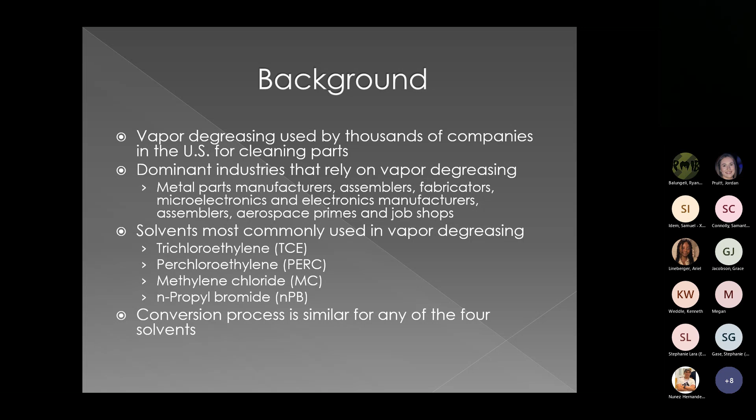The four halogenated solvents have a whole range of health and environmental problems. In terms of health effects, they're all carcinogens, and some also cause nerve damage and reproductive and developmental problems. Methylene chloride in particular has caused deaths from acute exposure. In fact, because of the numerous deaths it's caused, EPA ended up banning the use of methylene chloride in consumer product paint strippers a couple of years ago. That was where most of the deaths were occurring, from exposure to these consumer product paint strippers.

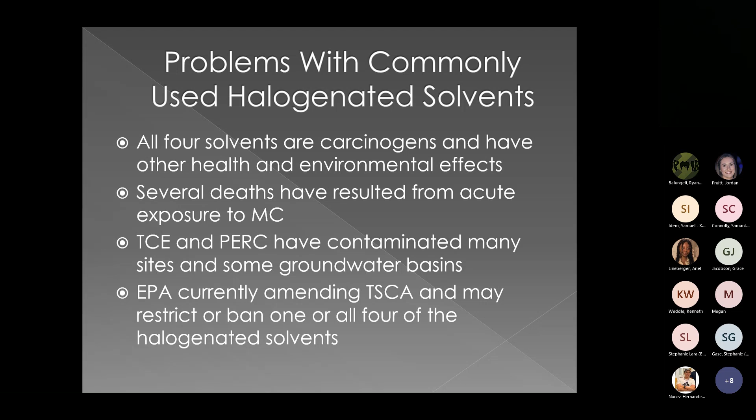For many years, PERC and TCE have leaked from operations or been improperly disposed of, causing contamination of soil and groundwater in many parts of the country. Some states and local districts have restricted the use of these solvents, and EPA, under the Toxic Substances Control Act, or TSCA, is currently evaluating the four solvents for potential nationwide regulation. EPA's findings so far under TSCA indicate that all four solvents pose an unacceptable risk in virtually all of their applications, including vapor degreasing. So the solvents are likely to be more stringently regulated or banned across the country in the future.

Now, some of you may not be familiar with the vapor degreasing process, and I'm just going to describe it briefly in simple terms. For those familiar with it, bear with me. A vapor degreaser is a stainless steel tank with a heater in the bottom and a set of cooling coils around the top perimeter.

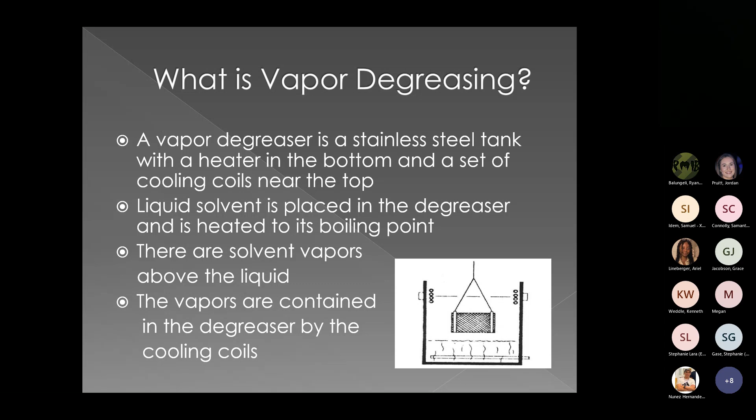You place liquid solvent in the vapor degreaser and heat it to its boiling point. This establishes a vapor zone of solvent above the liquid zone. The cooling coils around the top condense the solvent vapors back into the liquid zone, essentially holding the solvent in the vapor degreaser, although they don't do too good a job since there are, of course, emissions that do occur.

Now, the way vapor degreasing works is that you place the dirty parts into the vapor zone of the degreaser, either in baskets or on fixtures. When you put those cold parts into the warm solvent vapors in the vapor zone, it causes those vapors to condense onto the parts, and that cleans them.

The dirty solvent liquid falls into the liquid zone of the degreaser so that the vapor zone is always composed of clean solvent. This definition is very simplistic for the basic degreasing process, and many systems and processes have additional features and are much more complex.

But the degreaser I showed you on the previous slide is an open top degreaser, and the solvents used in those systems must not have flash points. Flash points for solvents are lower than boiling points, so if you heat the solvent to its boiling point, it will encounter the flash point first. And if there is a source of ignition present, the solvent could either ignite or explode in the vapor degreaser, which would obviously be very dangerous.

So the 4 halogenated solvents that I'm discussing here don't have flash points, so they don't pose that problem. Near the end of the presentation, I'm going to return to this point, which is why I brought it up.

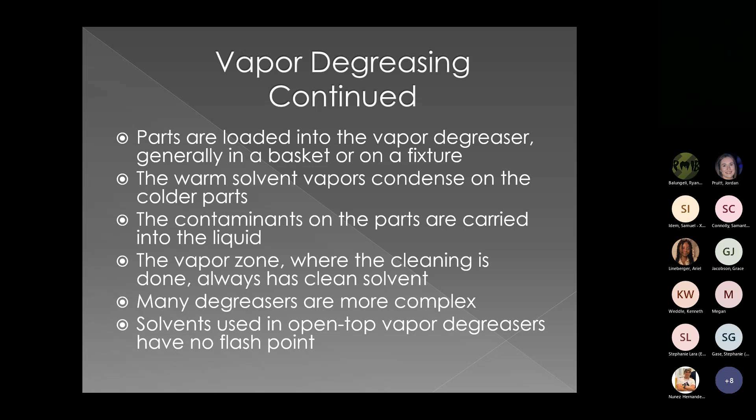Now, turning to the case studies, I worked with 8 different companies in 3 projects for the case studies I'll discuss today. There were 4 companies in a project I worked on with the nonprofit organization called the Pollution Prevention Resource Center, or PPRC, in the Seattle area. That project was sponsored by EPA under the Pollution Prevention Program under a grant. I also worked with 2 companies in a project sponsored by the Hazard Evaluation System and Information Service, or HESIS, which is part of the California Department of Public Health.

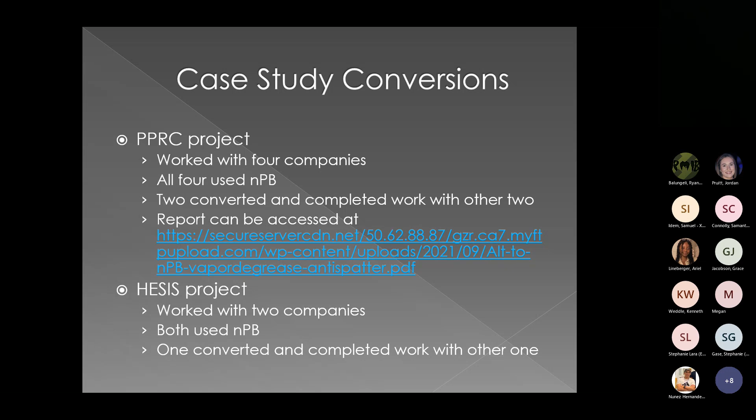In all 6 of these cases, the companies were using N-propyl bromide. That really isn't very surprising, since many regulatory agencies and pollution prevention providers have recommended that companies switch away from the 3 chlorinated solvents to N-propyl bromide in the last decade or so. That follows from the fact that N-propyl bromide wasn't designated a carcinogen until quite a bit later than the chlorinated solvents were. So many companies did move into that solvent.

I'll also discuss 2 case studies of companies I worked with in Southern California at an earlier time period, and these 2 companies used trichloroethylene. 5 of the total 8 companies I worked with ended up converting to the alternatives, and I completed work with the other 3 companies, but they didn't make the conversion within the project timeframe. As you'll see as I go on, I tried to select the case studies to represent a wide range of different types of operations that rely on vapor degreasing.

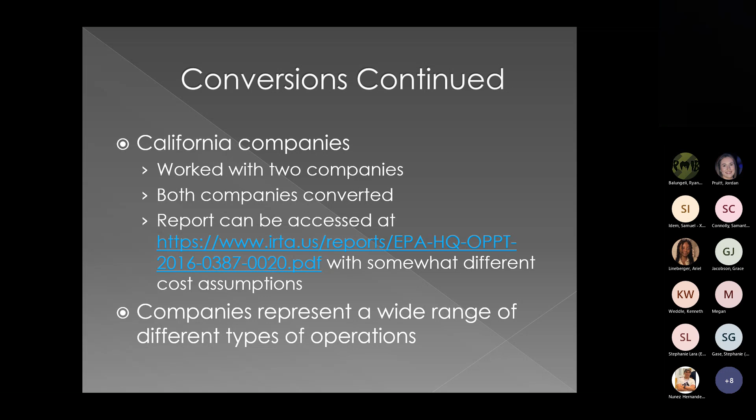The first case study I'll talk about is a company called MAPSCO in the Seattle area. MAPSCO offers non-destructive testing services to aerospace companies. The type of non-destructive testing the company performs is called magnetic particle inspection. In magnetic particle inspection, you use a fluid that contains magnetic particles and you magnetize it. You place the part that you want to look at in the fluid, and if there's a flaw or crack in it, the magnetic particles will line up next to it so you can identify where it is and repair the part rather than discarding it.

Historically, the company used a large N-propyl bromide vapor degreaser for cleaning the parts. We tested the company's parts with a water cleaner supplier, a company called Brulin, and we identified a suitable cleaner that the company was already using in other parts of their facility. The parts were cleaned effectively in the Brulin lab in an immersion agitation system, and accordingly, I sent in an equipment supplier to quote the cost of this type of system for MAPSCO, but MAPSCO felt the cost was too high.

So MAPSCO did find a secondhand system, but it was purchased by another company before they could buy it. So then I got in gear and found another place offering a secondhand system of the type that was originally quoted, and MAPSCO ended up buying it. They've been using it successfully for about a year and a half to two years now.

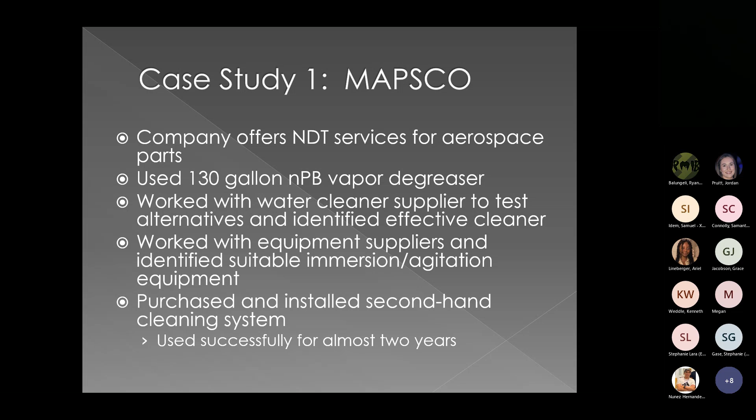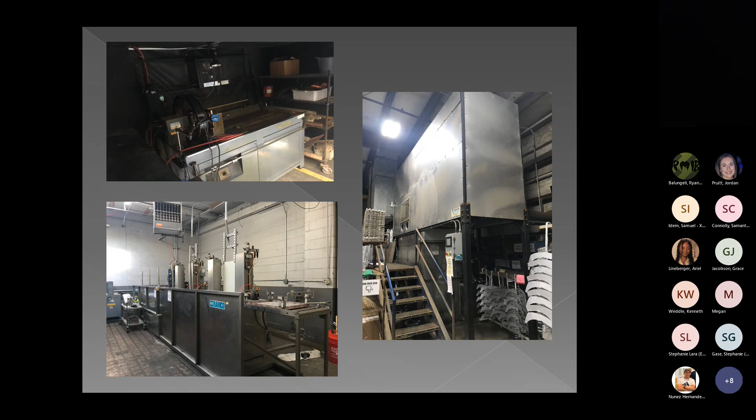In general, I also don't include the cost of the vapor degreaser in the analysis because in nearly all cases, the degreasers were purchased years ago, sometimes decades ago, and they've been paid off by now. I'm not going to be able to discuss the assumptions I made to do the cost analysis comparison for MAPSCO or the other case study companies today because of time constraints. I wanted to give you a flavor of a number of facilities, so I didn't want to take a lot of time describing how I got the numbers.

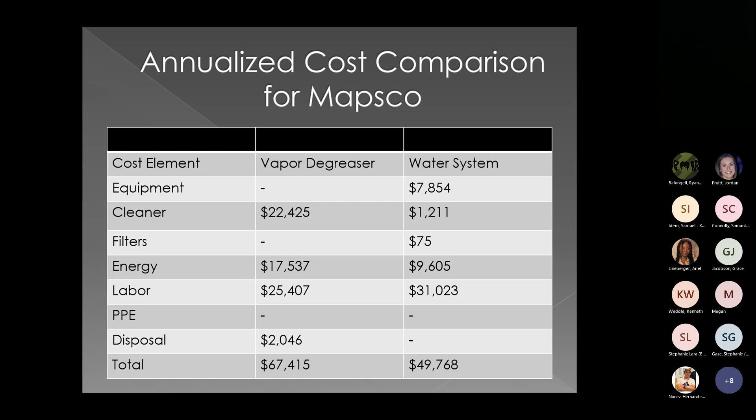I do discuss 4 of the case studies in much more detail where you can get this information in the PPRC document I referenced earlier. And as you can see, perhaps from the total cost figures on this slide, MAPSCO reduced their cost of cleaning by 26% by converting to the water cleaning system.

The second company I'm going to discuss is called Exotic Metals Forming, and they're in the Seattle area as well. They make ducting of all kinds for aerospace and industrial applications. The company used a large N-propyl bromide degreaser for many years. Now, Exotic is subject to a lot of aerospace requirements, and they're also subject to the European Union REACH requirements, and those can be very stringent, and sometimes they're different from the aerospace requirements. So you have to be careful.

We didn't want to have them convert to something that was restricted under the EU REACH regulations. So we did testing with a water cleaner supplier, and we did identify a good alternative. The company ended up converting to that cleaner for this operation and for most of their other water cleaning operations in the facility. The company was able to use one of their existing immersion agitation systems for cleaning the parts that had gone through the vapor degreaser previously. So they didn't even have to purchase a new cleaning system, which gave them a lot of savings.

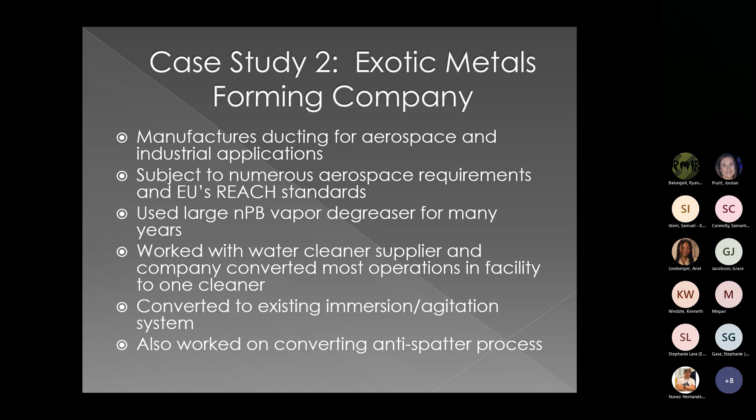And we also worked on a related process with Exotic using an anti-spatter product in a laser cutting operation. Over the years, I've worked with many different facilities, and I often would work on other processes when I started on a cleaning process with them—other related processes, or sometimes unrelated, that also use solvents.

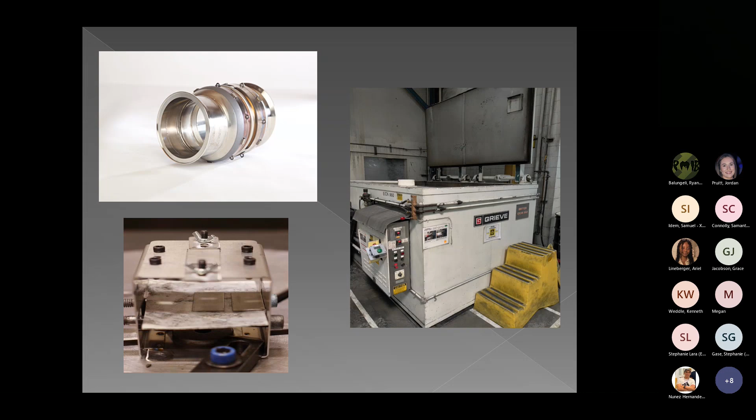So on the top left of this slide, the picture shows one of the company's parts. As you see, they're very complex. The picture on the right shows the vapor degreaser Exotic used. The bottom picture shows a fixture a company engineer designed for testing the anti-spatter alternatives.

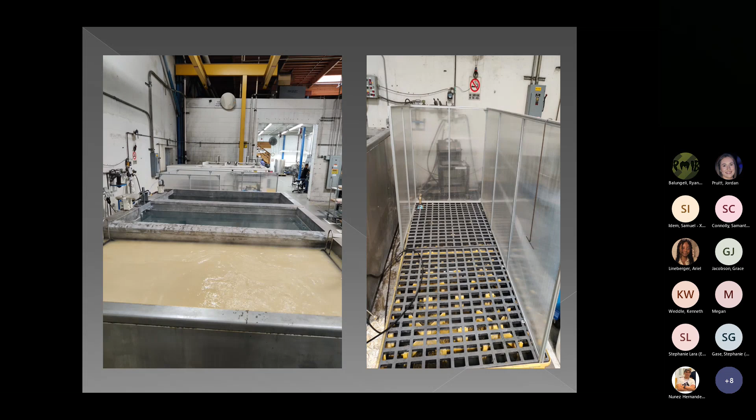This slide, the picture on the left, shows the immersion agitation system water cleaning bath and the 2 rinse baths that follow it. The picture on the right shows a temporary pressure washer rinsing station the company used, and they have to use that after the other 2 rinses. They have to really rinse these parts in order to get them cleaned. Exotic planned to purchase a better pressure washer station in the future, and I'm sure they've done that by now.

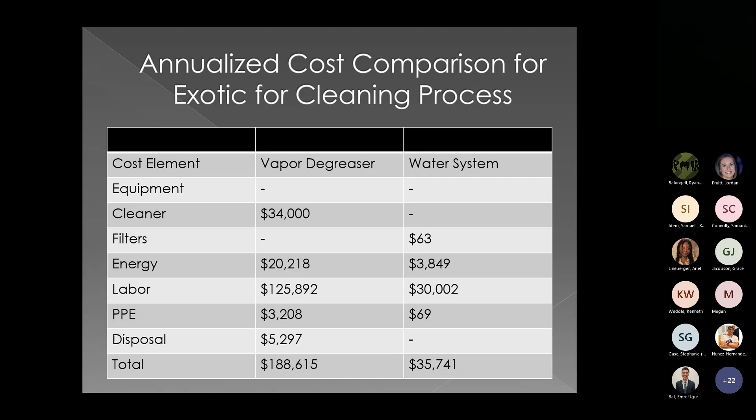This slide shows the annualized cost comparison for the cleaning operation. Again, I'm not going to describe how I determined the numbers. You can get that in the reference I gave you earlier to the PPRC report. But the total figures in the table show that the company reduced their cost of cleaning by 81% through the conversion. Now that is really a substantial reduction, and that's because they didn't have to buy a new cleaning system. They could use one of their existing systems.

So I decided to approach the supplier, and I spoke with the manager and asked if the company would be willing to reformulate the product. I even told him what family of surfactants he could use instead. But after weighing this, he decided that the company didn't want to change the formulation. This was probably quite short-sighted, since it's likely that endocrine disrupting surfactants will probably be regulated in the US in the not too distant future as well.

So I then approached Brulin, the company that was supplying the new water cleaner, and I asked them if they would try to formulate a water-based anti-spatter.

And they decided to accept that challenge, even though they didn't carry any products of that type at all. But they were able to make a water-based anti-spatter, and they also conducted all the testing necessary for satisfying the aerospace requirements for the company to use that. And the anti-spatter product they developed performs really well, and it's very cost-effective.

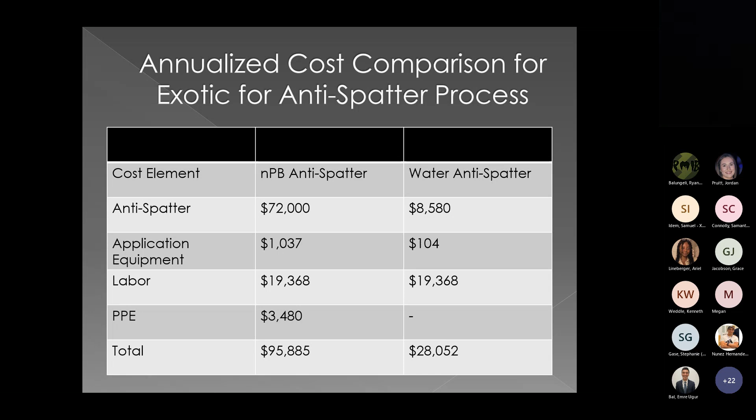So Exotic did convert to that product, and it ended up reducing the cost for the anti-spatter by 71%, which again is a substantial savings.

On the PPRC project, I also worked with a plating company, a job shop, that used an N-propyl bromide vapor degreaser for cleaning polishing compounds from parts made of a whole variety of substrates. Now, I knew from my past experience that polishing compounds are difficult to remove, and I knew we would need an aggressive water cleaner, but more importantly, an ultrasonic cleaning system for cleaning the parts.

Ultrasonic systems are very aggressive. We did testing with a water cleaner supplier and found a suitable cleaner. I arranged for two equipment suppliers to provide quotes for ultrasonic systems, and the company at the time considered them, but they didn't make the conversion in the time frame of the project.

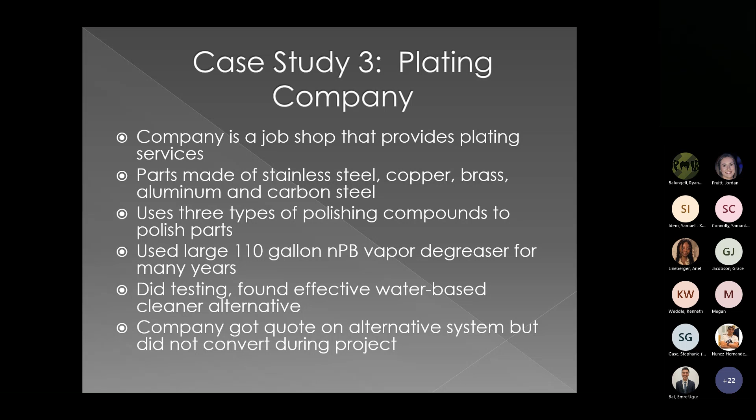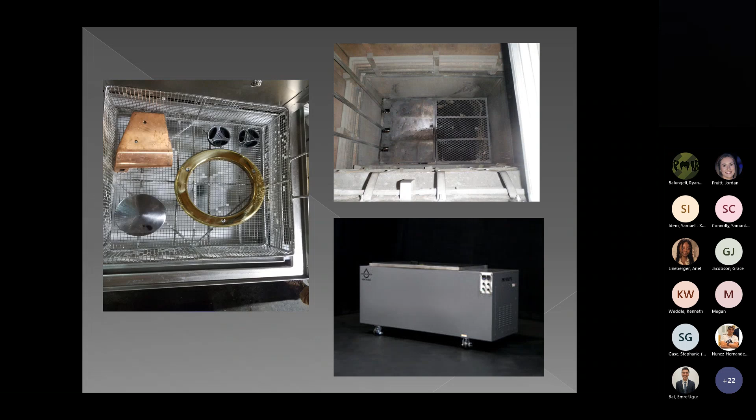This slide shows the variety of parts the company has to clean on the left, made of a lot of different substrates—steel, stainless steel, brass, and copper. On the right, the picture shows the inside of the vapor degreaser, which in this case is really deep and has to be lowered into the floor of the facility. The picture on the bottom shows the ultrasonic system I used to do the cost comparison.

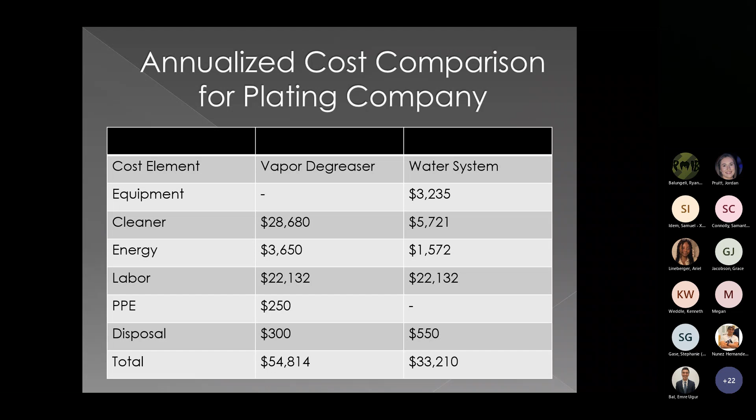This slide shows the cost comparison. I'm not going to go into the derivation of the figures, but note that the total values show the company would reduce their cost by 39% if they made a conversion to the water cleaner.

The last company I worked with on the PPRC project was a tube manufacturer who made small diameter tubes used to transfer liquids and gases from one place to another in aircraft. The company had a really old vapor degreaser when I started working with them—I probably hadn't seen one like that for 35 years. They hadn't paid attention to it before, but they had to when I started working with them, and they ended up converting to a new, tighter vapor degreaser shortly after I began work.

Now, again, we found an appropriate water cleaner. Another similar company in Southern California that I knew about had converted to an ultrasonic immersion system some years ago. But the equipment supplier I was working with and I thought we could use a different operation that would be less costly, since ultrasonic cleaning systems are quite expensive, relatively speaking.

We did testing in a spray cabinet with a specially designed fixture to flush the insides of the tubes, and it ended up working successfully. The equipment supplier quoted both an ultrasonic system and a spray cabinet, and as expected, the cost of the spray cabinet was the lower of the two quotes. The tube manufacturer evaluated the quotes, but again, they didn't convert within the time frame of the project.

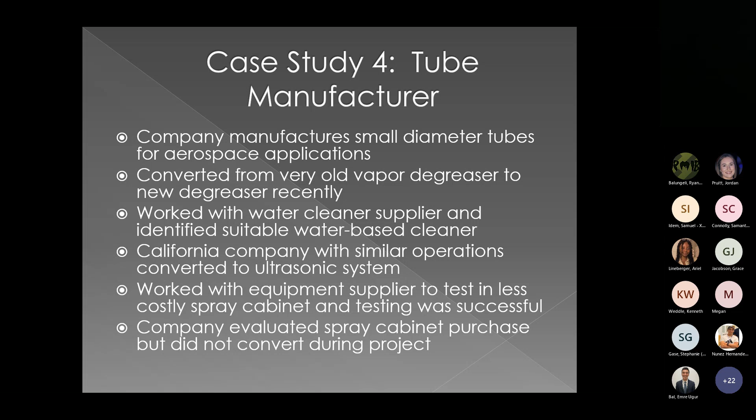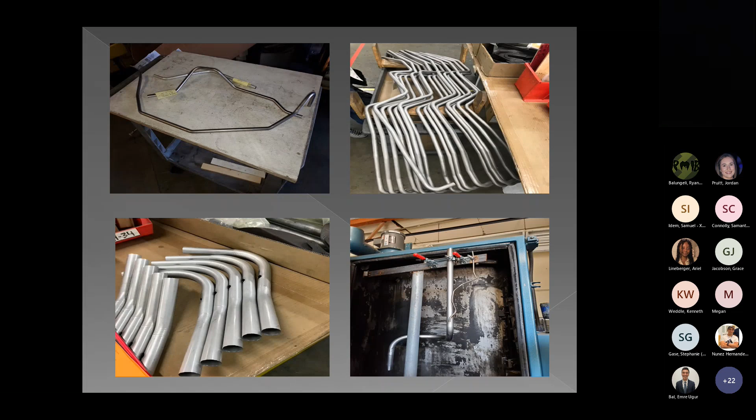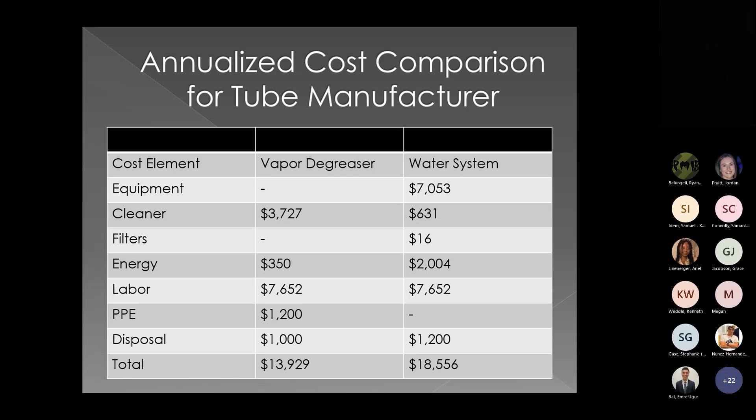In the HESIS project, moving on to it, I worked with two companies in Northern California. One was a microelectronics manufacturer. The microelectronics they made were used in medical devices, so the company was subject to Food and Drug Administration requirements. They were using a thick film deposition process to lay down layers in their manufacturing, and needed to remove particles and handling soils several times during the process. They'd used an N-propyl bromide vapor degreaser for many years for cleaning the parts from this process.

Partway through the project, I learned they had a water cleaning process for removing flux from printed circuit boards. Although the cleaner they were using for that process wasn't necessarily ideal for the thick film deposition parts, I thought it would be worthwhile to try using it in case they wouldn't have to convert to an alternative cleaner. So we did the testing, and the defluxing cleaner actually worked well.

I then provided the company with information on the problems with N-propyl bromide, and they gave the FDA that information along with the quality control information from the cleaning tests we had done with the defluxing cleaner. The FDA approved the company to use the defluxing cleaner, and I have to admit that was very quick approval. In some cases I've known about historically, it can take up to 7 years to get that approval to change the process. The FDA is very reluctant to do that.

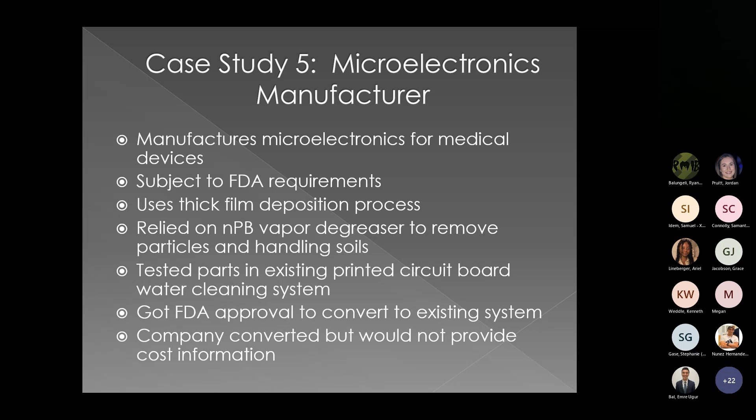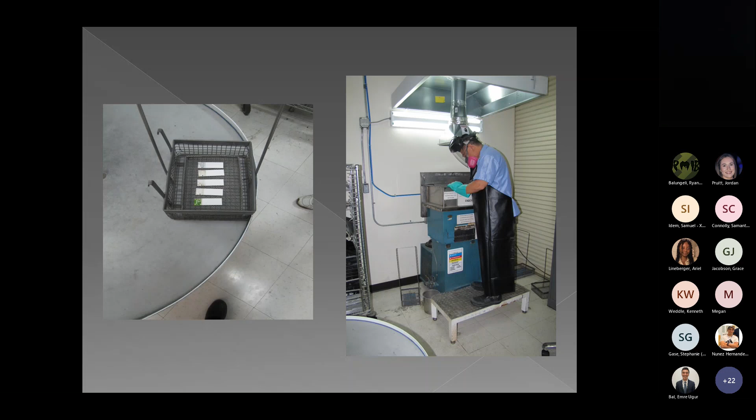The second company in the HESIS project I'll discuss is a job shop that makes optical components. The company uses materials like pitch and wax to polish the components, and those types of contaminants are extremely difficult to remove. They'd been using an N-propyl bromide vapor degreaser for several years. I'd worked with some companies in years past in Southern California, and had assisted them in converting to a soy-based cleaner, which turns out to be very good at removing things like pitch and wax, which were the contaminants we needed to remove.

I asked an ultrasonic system manufacturer to test the company's parts, since we'd need ultrasonics too, because you need an aggressive cleaning system. The soy cleaner followed by a water cleaner ended up cleaning the parts effectively. You need to follow it with a water cleaner to rinse off the soy, or it'll leave a residue.

I then arranged for two equipment suppliers to quote systems, and the company evaluated the quotes, but again didn't make the conversion. I did the cost comparison though, based on the company purchasing the system with the larger baths, reasoning that they wouldn't need to be changed out as often, which could save on labor costs.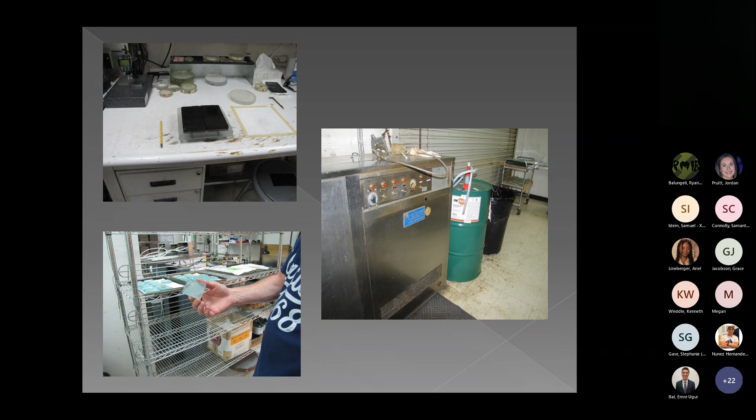The comparison in this case shows the company would be able to reduce their cost of cleaning by 4% if they were to convert to the soy-based cleaning alternative.

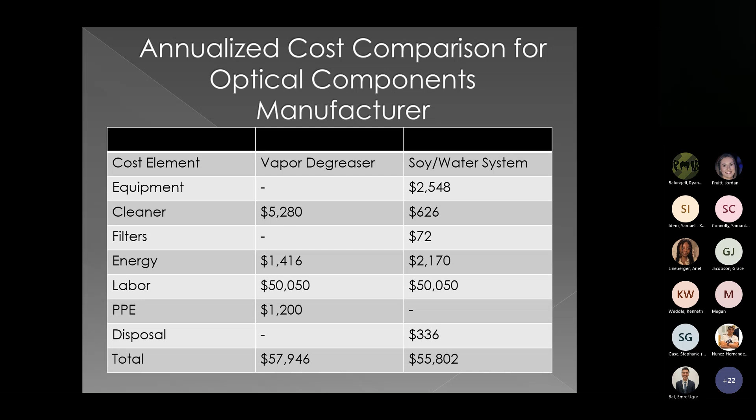The 7th case study is a company that takes older valves in from the field and refurbishes them. The valves they process are made of many different substrates and used in various applications. One valve they were processing, for example, was used to hold flour in a food processing facility. They had a lot of caked-on material when these valves come in, contaminated with many different substances that need to be removed before they can go on to further processing.

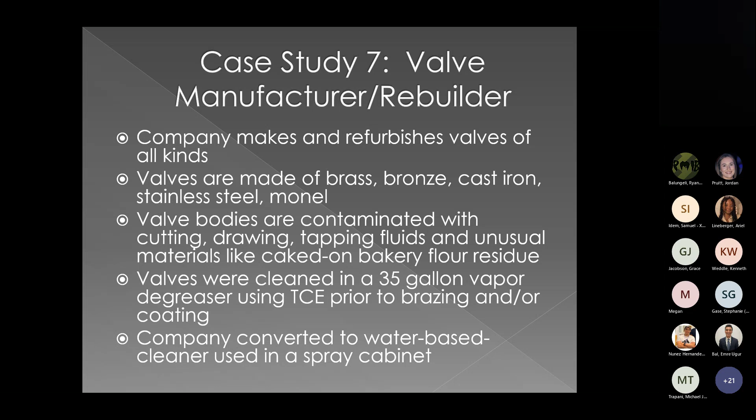The company had used a 35-gallon trichloroethylene vapor degreaser for many years, and they did end up converting to a water-based cleaning system. We had tested the parts with a water cleaner supplier and found an appropriate cleaner. The system the company purchased was a large spray cabinet, which I'm showing there.

As you may be able to see, you have a turntable down here in the bottom, and you place the cleaned part on that turntable. Then you have a spray bar, as you see here. This is a spray cabinet, so the cleaner is sprayed onto the parts. That spray bar can be adjusted up and down depending on the size of the parts, so it can accommodate a whole range of different sizes. The spray pressure in a cabinet like this can be as high as 100 pounds per square inch.

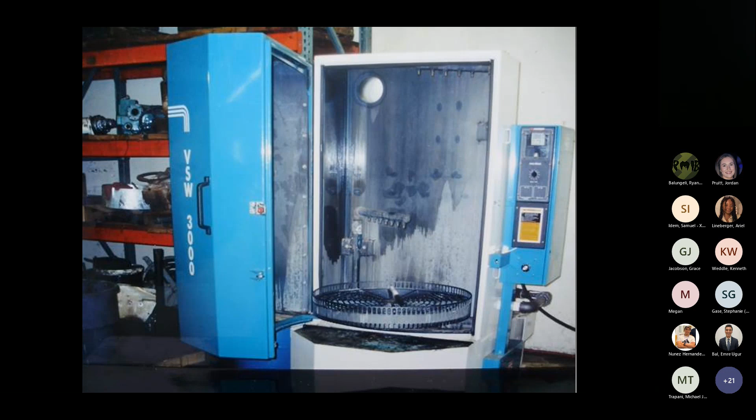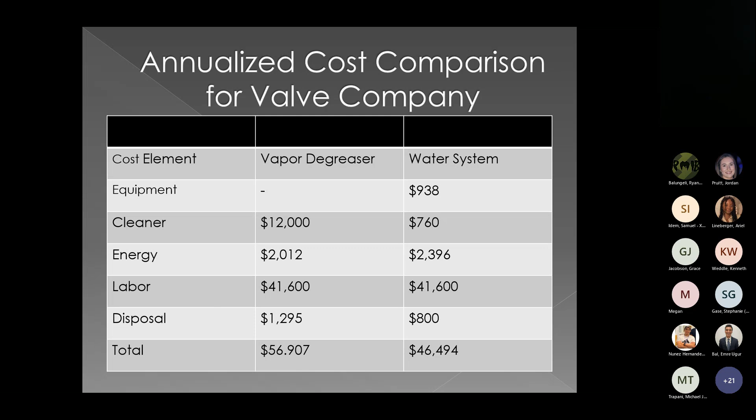This slide shows the cost comparison for the conversion. I'm not going to go into the details of the assumptions I used, but I updated the costs here, so they're somewhat different from the costs in the reference I showed you earlier for these two facilities, this facility and the next one I'm going to describe. The figures in this case show that the company reduced their cost of cleaning by 18% by converting from the vapor degreaser to the water cleaning system.

Now the last case study is a company that manufactures nameplates. The vast majority of the nameplates are made of aluminum, probably nearly 90%, but they also make some out of stainless steel and brass. The metal stock arrives at the facility with a protective oil coating, which has to be removed before processing. The company was cleaning about 1,000 pre-cut nameplates per day in a 50-gallon vapor degreaser, and that's an extremely heavy workload.

So again, we conducted testing with a water cleaner supplier and found a cleaner that was effective. Because of the high workload, we thought the company should test a conveyorized rather than a batch cleaning system so they could save on throughput and labor. The testing indicated that this was a good decision for the company.

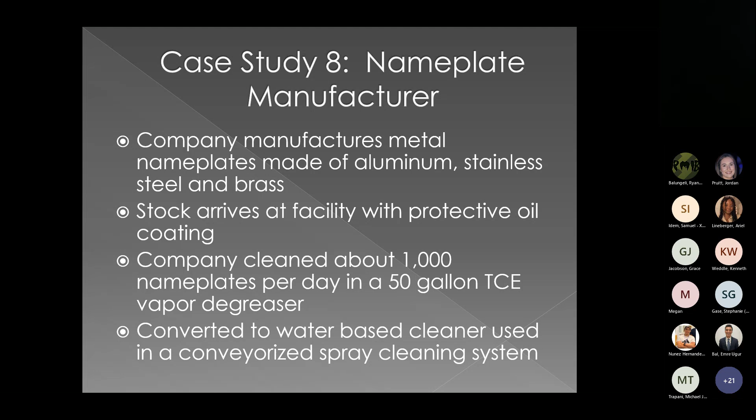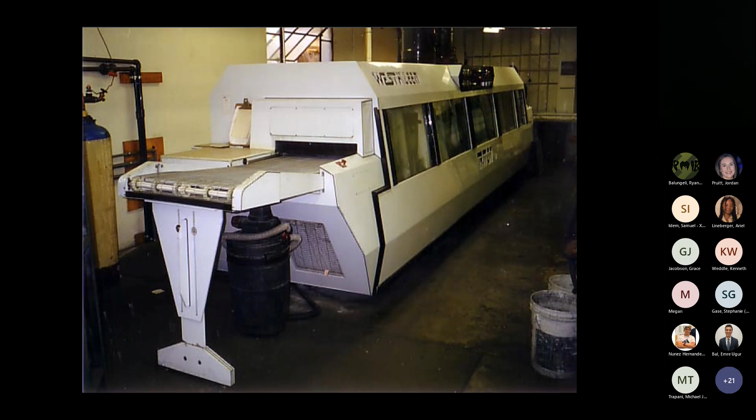The company did purchase a conveyorized system for use with the water cleaner. I'm showing the system here on this slide. You place the nameplates on the conveyor belt at the entrance of the system, and it has a wash section, a rinse section, and a dry section. You spray the cleaner on and you spray the rinse water on, and the water cleaner is delivered at about 100 pounds per square inch pressure for cleaning the nameplates. The nameplates are then rinsed with deionized water in the second section, and then they go through a hot air dry section at the end, and they emerge from the other end of the system on the conveyor.

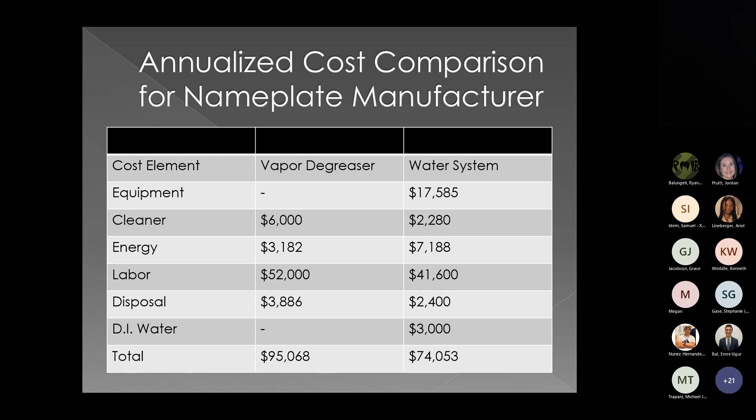This turns out not to be the case in Washington and Oregon, where four of the other case studies I worked with are located. In those cases, the tap water quality was good enough to deliver spot-free parts. I wanted to bring this up because you just have to be aware that the water quality may vary in different parts of the country, and in some cases they may have to use deionized water for rinsing. So the total cost figures for this facility show that the company reduced their cost of cleaning by 22% through the conversion, and a large part of the savings was the lower labor costs they ended up with from automating the system by choosing the conveyorized equipment.

If the company has always used vapor degreasing, they'll often be skeptical that water cleaners will work. I find the testing with water cleaner suppliers and water equipment suppliers can dispel those fears. You clean their parts and essentially prove it's going to work. You send the clean parts back to the facility and they can put them through the next process steps. When that's successful, you've essentially proven they can use water cleaners. The suppliers generally will do all the testing for companies for free because they want their business, and they'll often also do the testing to get suitable cleaners aerospace approved.

But there are many cleaners that already do have aerospace approval. I talked about how that one company on the anti-spatter operation, the water cleaner supplier who also made the water anti-spatter, did all the testing to prove that it would pass the aerospace standards.

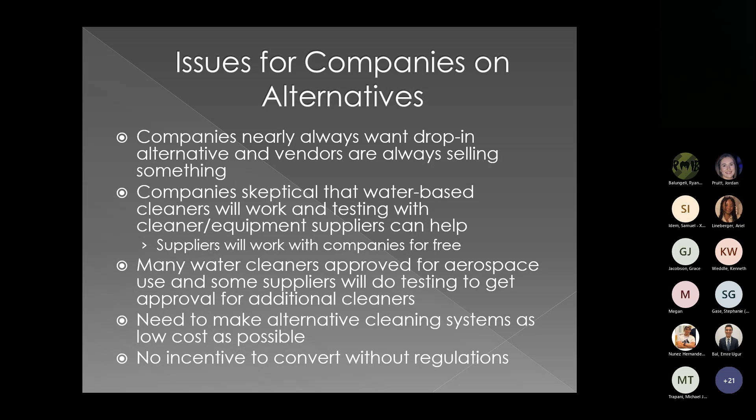Just to conclude then, water-based cleaners are viable alternatives and they're appropriate for the vast majority of companies using vapor degreasing today. And other safer alternatives like soy cleaning, for instance, they're suitable in certain cases.

Again, there is never going to be a magic answer, and you actually have to know a lot to guide companies properly, so they won't be heavily influenced by certain vendors who want to sell them inappropriate or unsafe alternatives. You have to be able to counter their claims.

As an example, I mentioned earlier that solvents used in vapor degreasers shouldn't have flash points. Some suppliers are telling users they can use a solvent they have as an alternative in their degreaser, and in some cases the solvent has a flash point, so companies have to be very careful about that. You don't want the degreaser to blow up your facility.

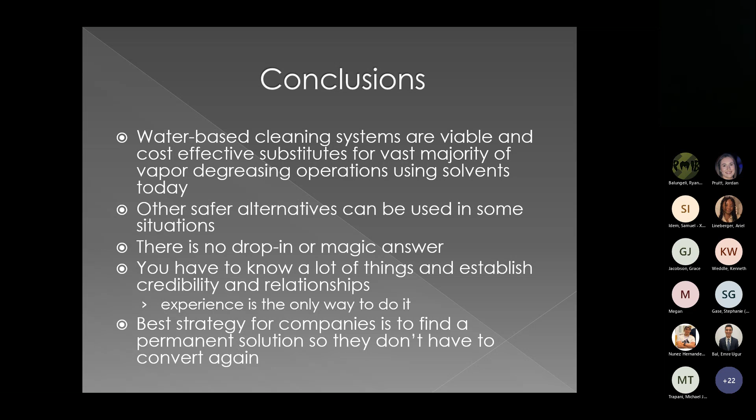Finally, there's been a lot of switching from one solvent to another as each solvent has been increasingly regulated over the years. I mentioned that N-propyl bromide was not found to be a carcinogen until years later, and so a lot of people switched to it, which was not a good option. Now, really the best option for companies is to find a permanent solution so they don't have to go along with this shell game of switching from chemical to chemical anymore.